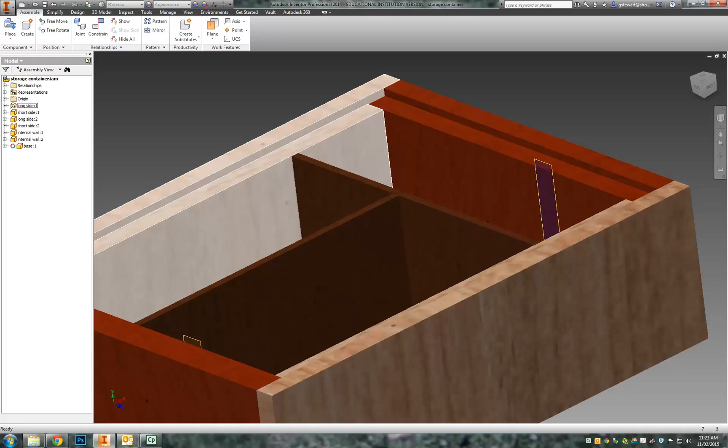I'm just going to open an assembly drawing that I did earlier to show you what we're going to do. So this is our completed assembly drawing, which contains our two sides, the long side and the short side, plus an internal wall, or two internal walls, and a base.

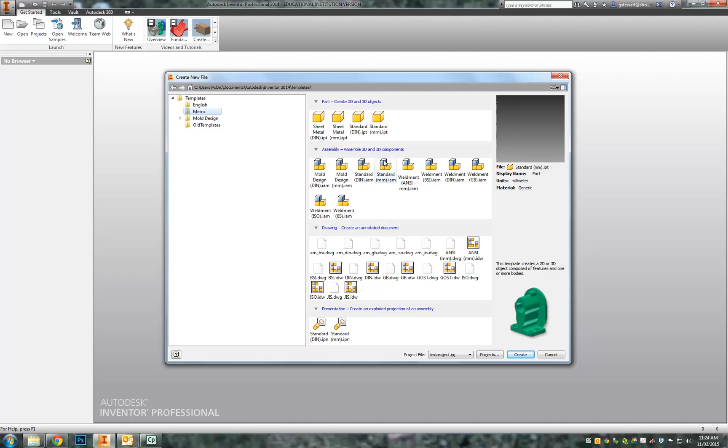So what I'm going to show you guys is how to do some constraints to join the edges together. Okay, I'll close this and create a new assembly drawing, so metric. We go down into assembly and select a standard millimeter IAM file, which is a standard assembly drawing.

Okay, once we've got that open, now that we've opened up our assembly drawing, we need to save it. So I'm going to click on save, and we want to save it into the area where we've got our stuff. I'm going to name it storage container.

I'm just going to name it number 2 because I've already created a storage container before. So I'm going to create a storage container in here. Okay, so we've got our storage container now named up the top here, and we can start to place in our componentry.

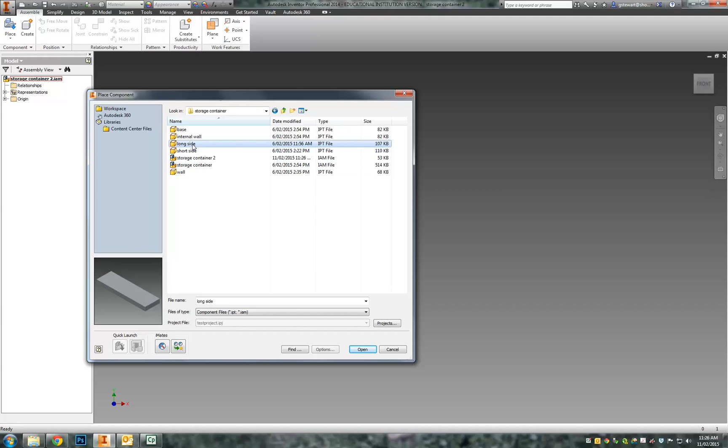So I'm just going to go down into this where I've saved it and place our long side in, and we can place one part in.

And what we want to do, we want to place our second part, but we've got an X, Y and Z axis. What I'm going to do is rotate it around. Oh, actually I didn't want to do that, I just made a mistake, so I want to place another part in. So let's just select out of our long side here.

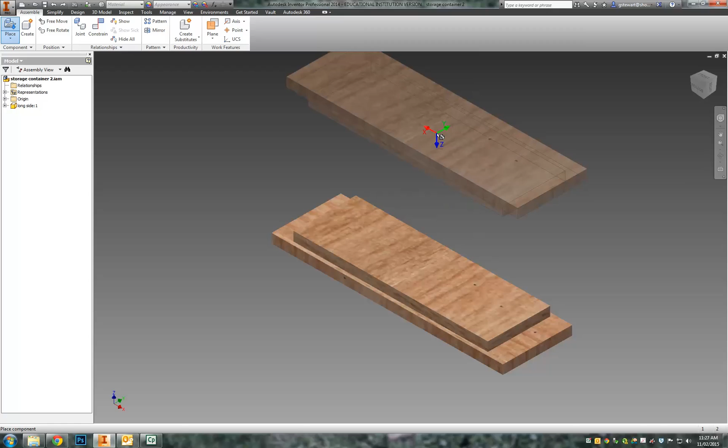We're going to rotate around the Y axis twice so it's facing each other. Okay, now that we've done that, we can click OK.

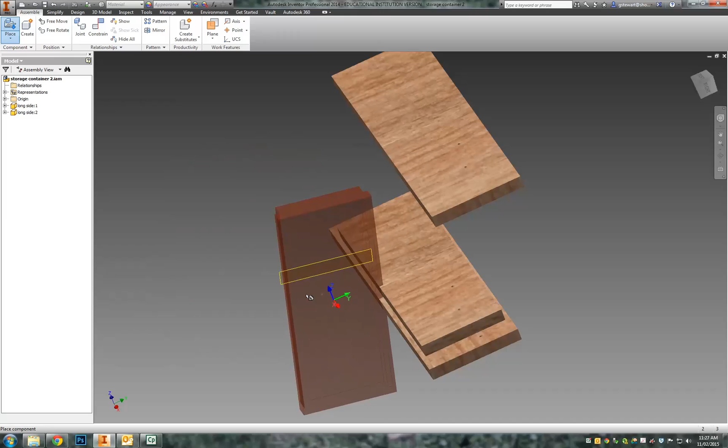The next step is we want to place in our short side. Select that, and I'll put one there, and what we want to do, we want to rotate around the Y axis. 1, 2, okay, and accept that.

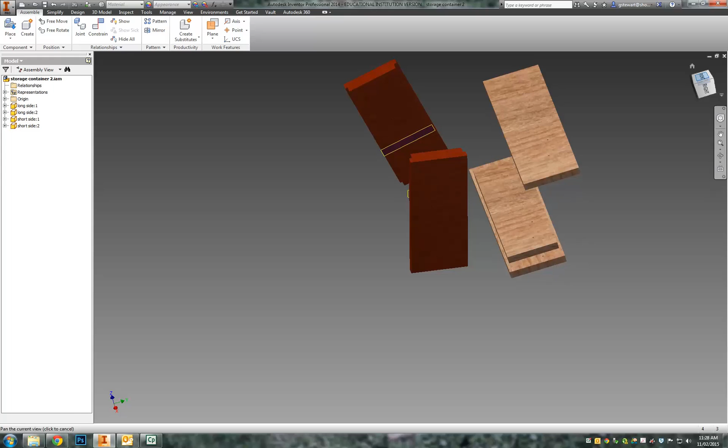So now if I look around, we've got our components fairly randomly placed in there. What we can actually do, let's just click on the front view using our view cube, and we can use our free move tool to move the components into the area we want them to go.

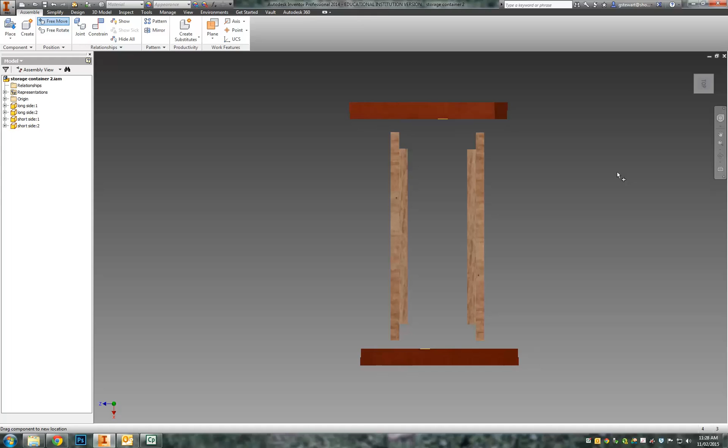Okay, and I'll do the top view. Just drag it across. Okay, when we're happy with that, we'll just go around.

Now we can start to use our constraint tools. So we click on constrain, and inside of the constraint we have several features here, but we're going to just use the mate tool, and we want to mate or flush.

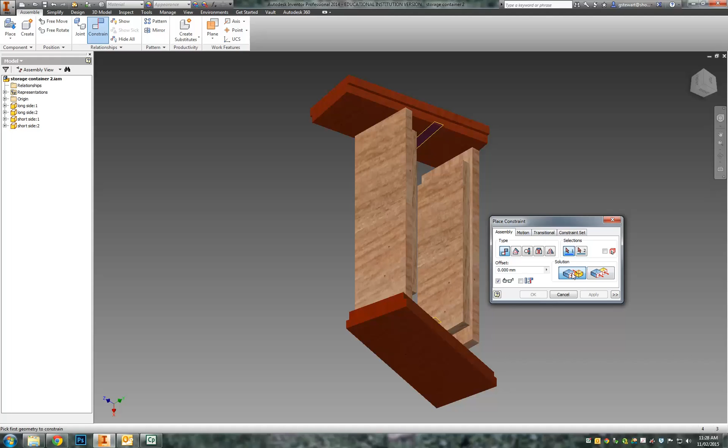So first off, we're going to mate them together. I'm going to click on a corner here, and I want that to mate up with this internal area here, and that joins that together. You can click on apply and zoom out, but you can sort of see it's got it aligned, but it's not actually flush yet, is it?

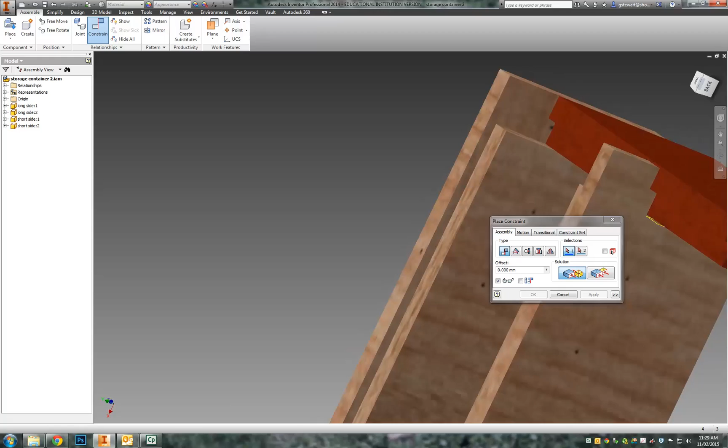So what we can now do is click on the flush tool. I'm going to put that edge with this edge, apply. Okay, so that's now locked in there.

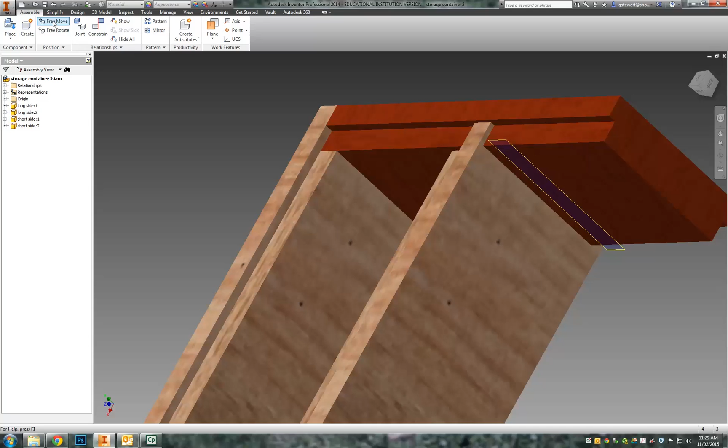Next thing we want to do is go around, we can press cancel actually, and we can go to free move. We might just move this one out a little bit.

We'll go around and click constrain again, mate tool. I'm going to click on an edge here, and I want to go around inside of here. Click on the mate tool there, apply, and I'm going to do the flush tool, and do the top of that with the top of this one, and get it to go flush.

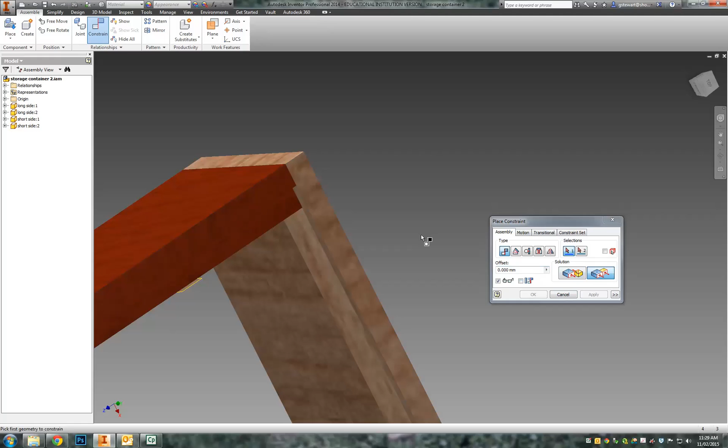Apply that. So we gradually work our way around, we're going to do a mate tool, and we want to mate that edge with that edge there. Apply that, and we want to flush that with that. Apply.

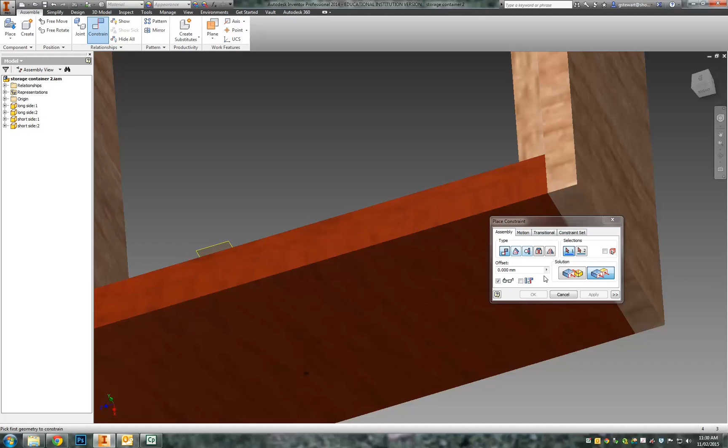And that's done. Okay, next thing we want to do is start importing our other components. But if you haven't made those components yet, now is a good time to start making them.